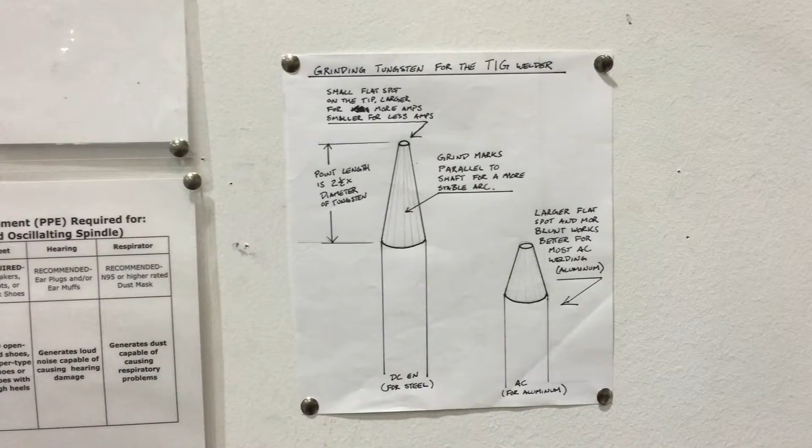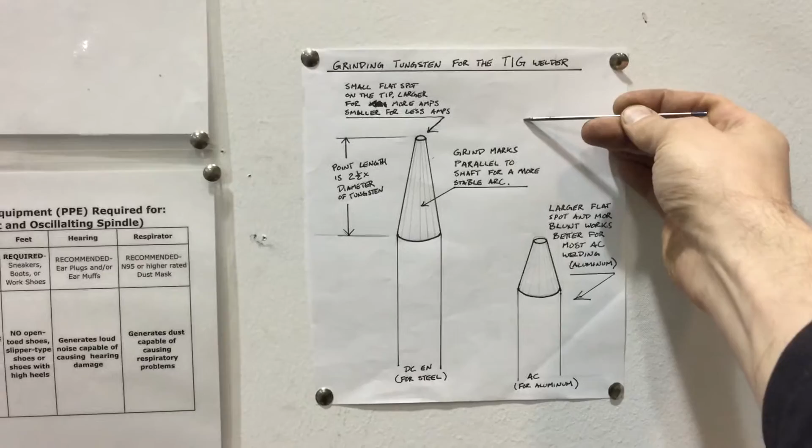Today we're going to take a look at how to grind your tungsten over in the Tyler Metal Shop. First thing you'll notice is there's a little poster up by the two sanders, the disc sander and the bench grinder, showing a drawing of the two different types of grinds.

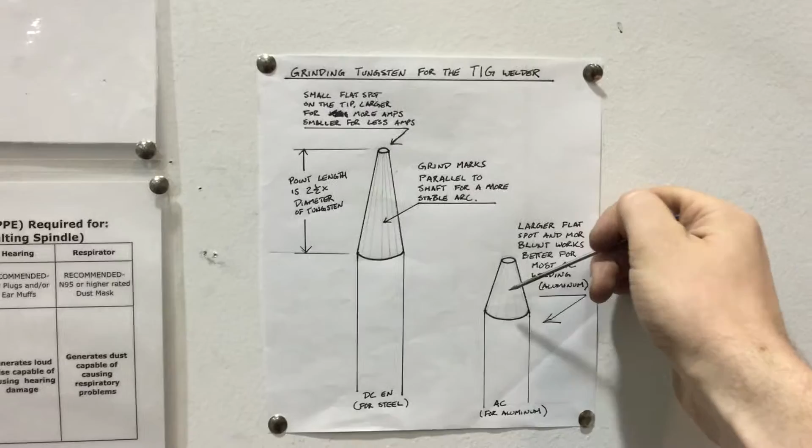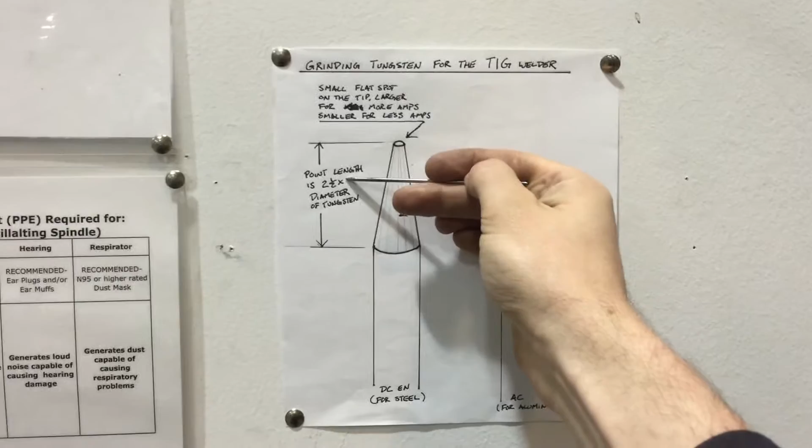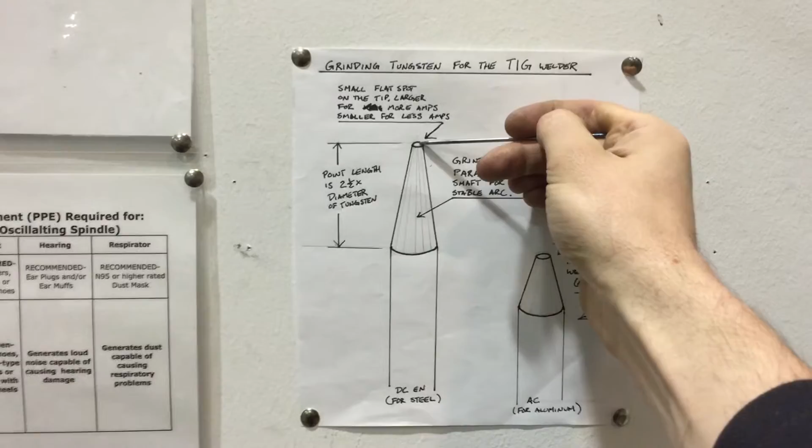One's for DC, one's for AC. If you're doing aluminum, you get a stubby point with a larger flat spot. If you're doing DC electrode negative, you can go for a longer flat or a longer, sharper point, but no sharper than about 2.5 times the diameter of the tungsten itself. The larger the flat spot, the higher the amperage you can carry with that electrode. The smaller the point, the finer the welding, and the lower the amperage you'll want to use. So you can vary that as well.

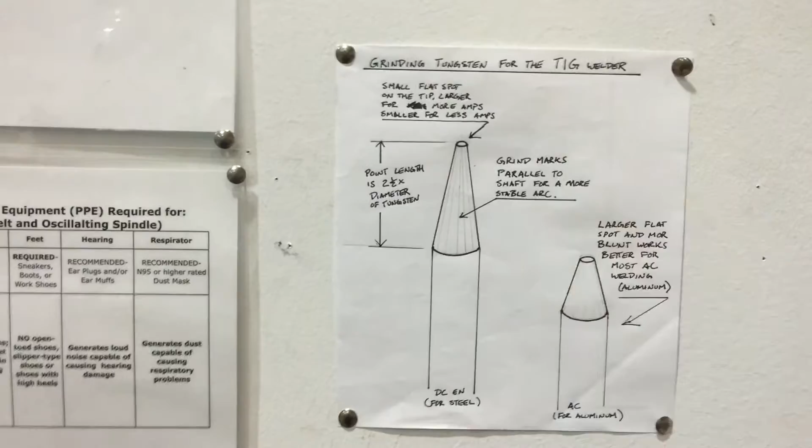The other thing you want to make sure you have is a parallel grind, and that's what we're going to show you how to do in this short video.

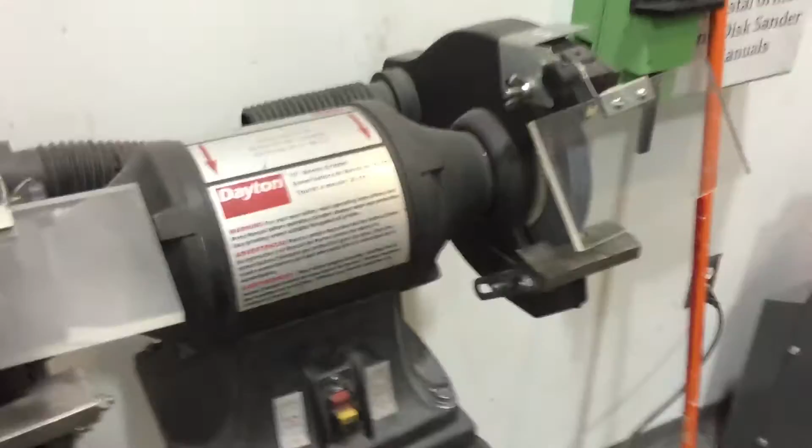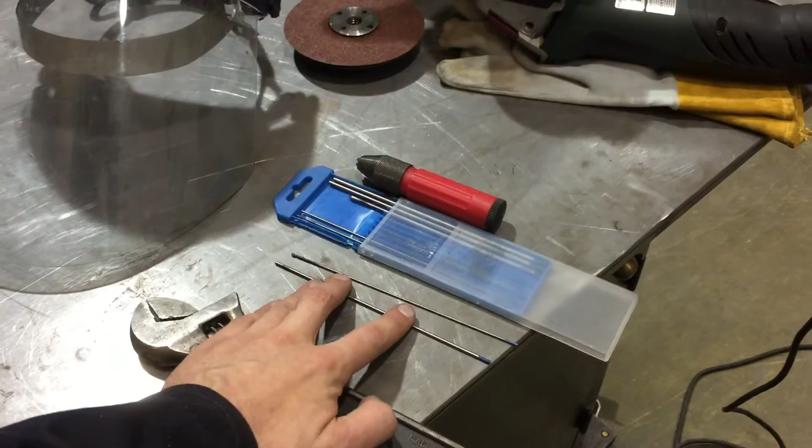First off, make sure you're always wearing your safety gear. Again, that notice is hanging by the bench grinder and the disc sander up on the wall. Follow all the safety rules that the two grinders and sanders both have. You'll also definitely want to wear a face shield, because this tungsten we're using is really brittle. It shatters very easily, so if it shatters while it's in your hands, you're going to be in really bad shape. You don't want those little pieces of debris flying at your face, so wear safety glasses in addition to a face shield.

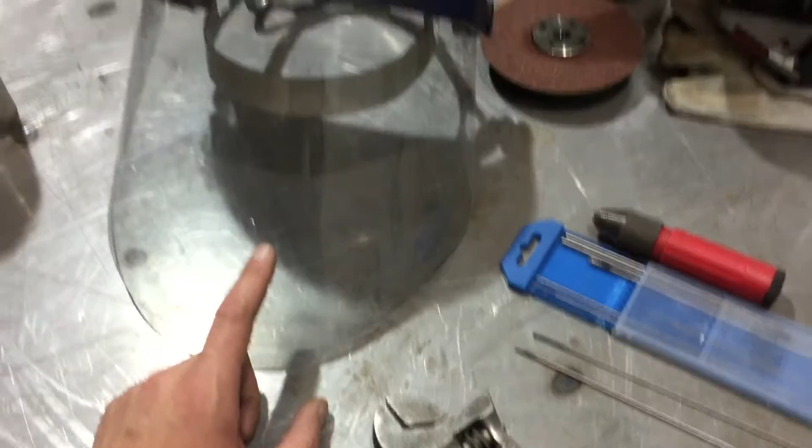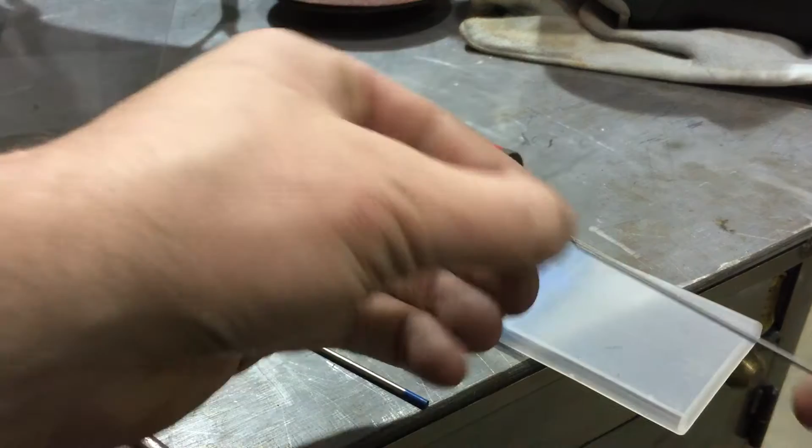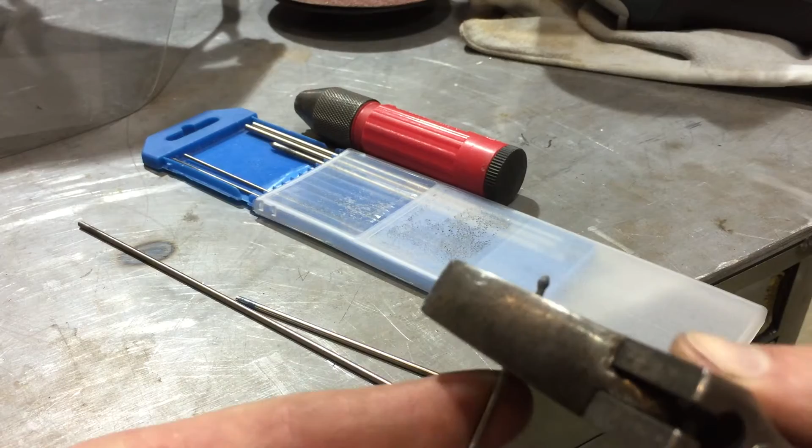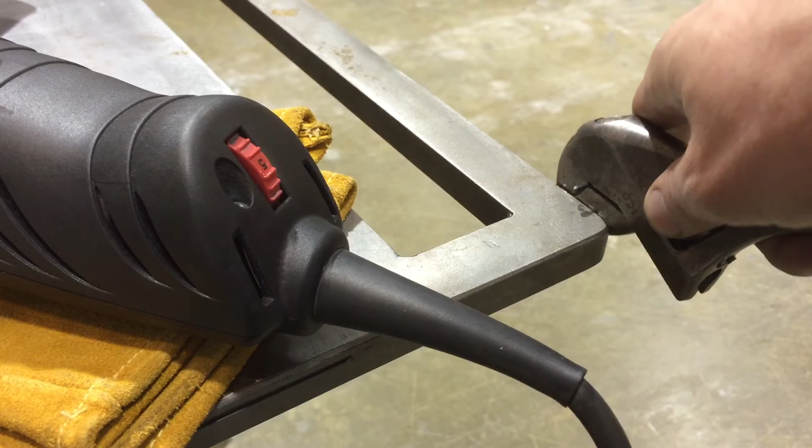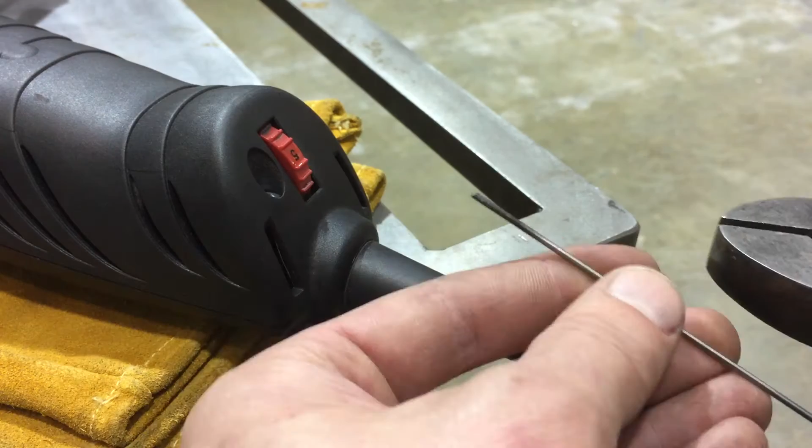Once you have that ground as needed, other times your point isn't in too bad a shape, you just need to tune it up. This one's actually in pretty good shape, but I'll demonstrate the grinding techniques with it.

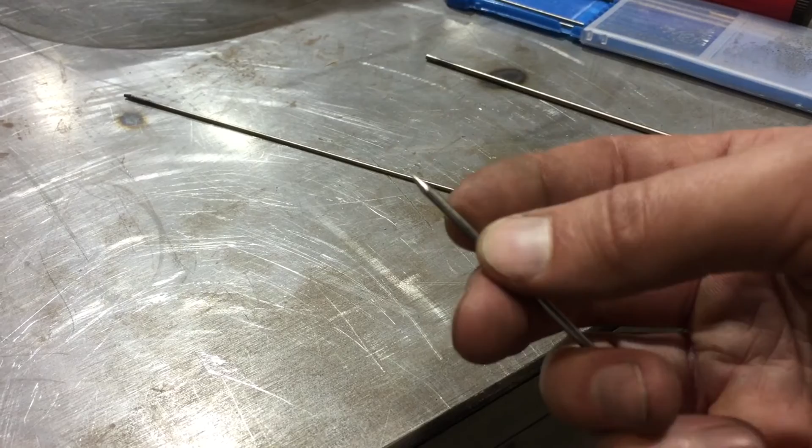Let's go over to our most common way to grind things, which is on one of these bench grinders. You get a good angle here, and basically just set it up so that you're holding and bracing your hand along the guard, and you turn your tungsten like so as you're grinding. This throws some debris down away from your fingers. Never grind on the side, and I also don't recommend going down like that, because it could get sucked in and shatter, so bad news there.

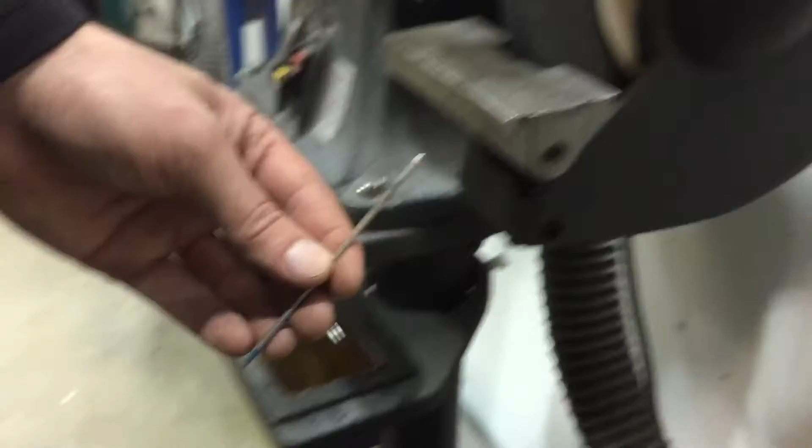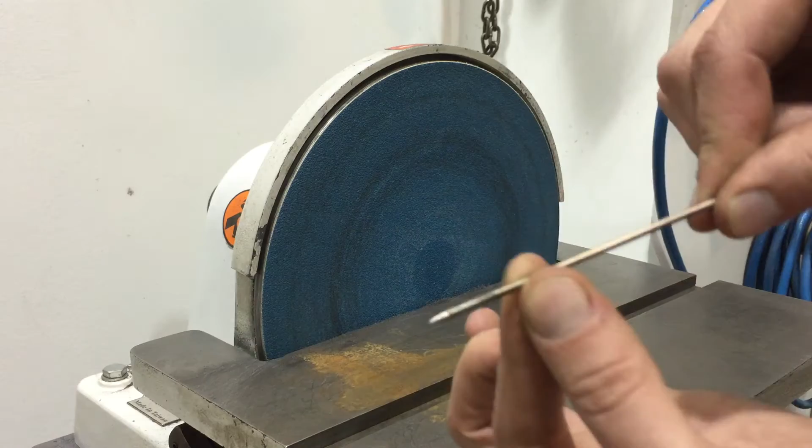If things get too hot, we have a little quench bucket down here with water to cool off your tungsten as you're grinding, so make use of that as well. Keep things cool. If you're using the disc sander, the grinding operation manually could look something like this, where you're holding it just between your thumb and finger, to kind of cradle it and turn it like so as it's spinning. You could be down here, you could be over here. The main thing is to try and get a straight grind.

My favorite method, however, is to cheat a bit and use a cordless or corded drill. You just chuck it up on the drill, and now the drill is doing the spinning for you, and it's holding it, and your hands are good and secure. Let's take a look at what that looks like.

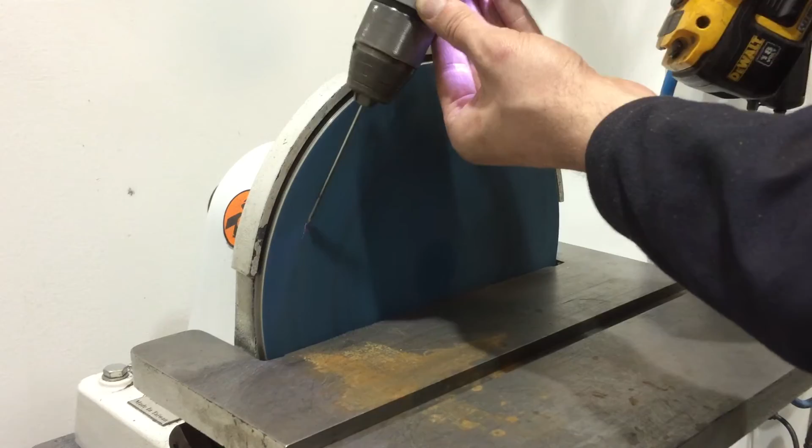So here's your parallel grind. You need to do a little flat spot. Always support it. You do that little flat spot, keep it moving, get your grind. If it gets too warm, you've got your little quench bucket here. So let's turn that on.

Always make sure that you're following the safety procedures of the various tools in the shop. Another thing to keep your hands safe, we'll see if we can make available for you.

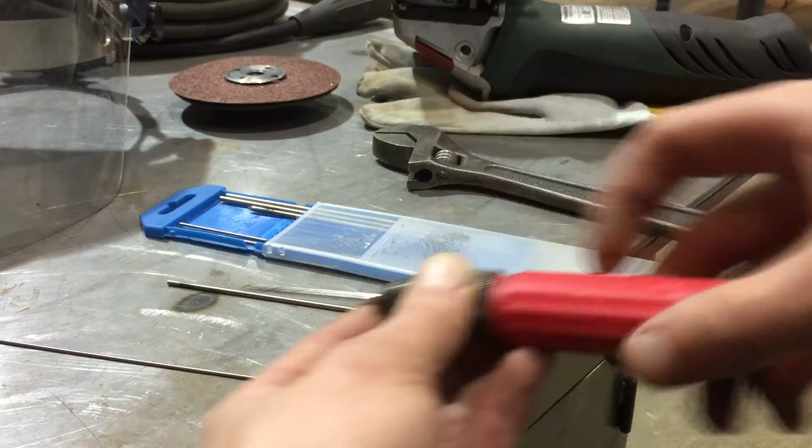As these tungstens get shorter and shorter, they wear out. This is a newer one, here's an older one. You can always put it in a pin vise, and that'll keep your hands safe as you're grinding away. So try and keep a parallel grind, keep your fingers safe, always wear your face shield, and make sure that you don't use any pieces of equipment that you don't feel comfortable with.

Another quick tip here, if you're having trouble with the crescent wrench tip, you can also just grind a little notch in your tungsten on a cutting wheel, and then it'll break off a lot easier too. You can usually use an abrasive wheel for something like that.

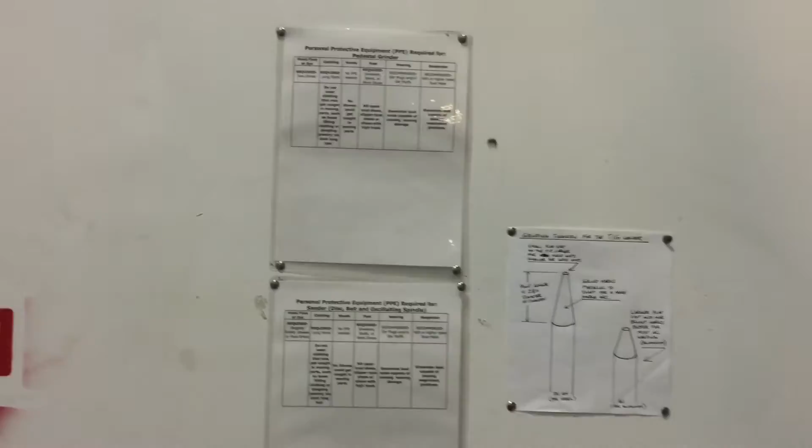Again, if you have any questions about any of the equipment, always follow safety guidelines posted by the equipment, and always ask your instructor or the shop technician. Never use any equipment that you are not familiar with or that you have not been cleared on.